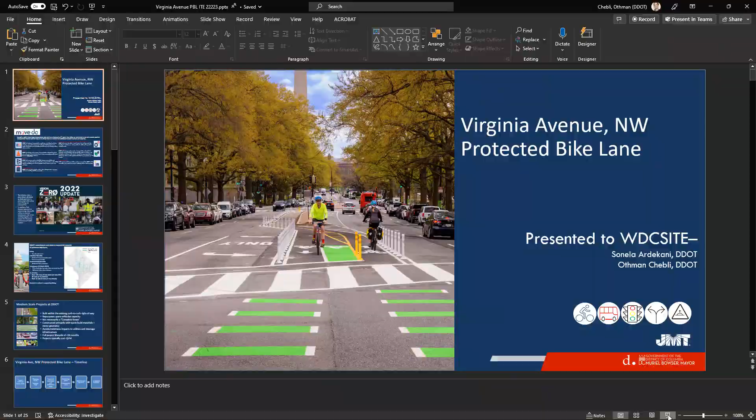Good afternoon, everybody. My name is Othman Chebli, and I am very excited to be here today to talk about the Virginia Avenue bike lane that DDOT completed last year.

As the introduction said, I manage the design and construction branch within TESD at DDOT, and today, together with Sonela, we're going to present the PBL project at Virginia Avenue that we completed. But before that, I wanted to briefly give you an overview of how DDOT makes these decisions and how it ties into our mission and what informs our decision making.

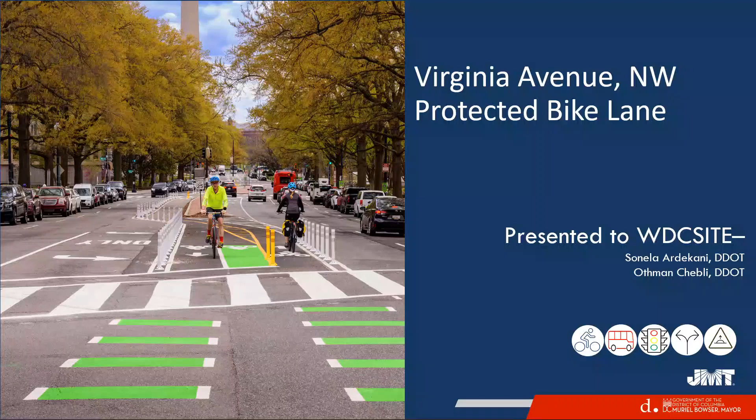The first thing we always go with is the moveDC plan. moveDC, I think most of you are familiar with it, is DDOT's long-range transportation plan. It sets a framework of 7 goals that reflect DC's commitment to address structural injustices and inequities while delivering excellent transportation facilities and systems in DC. The goals, as you can see, are equity, safety, mobility, project delivery, management and operations, sustainability, and enjoyable spaces. I don't want to spend too much time on it; I think most of you are very familiar with it.

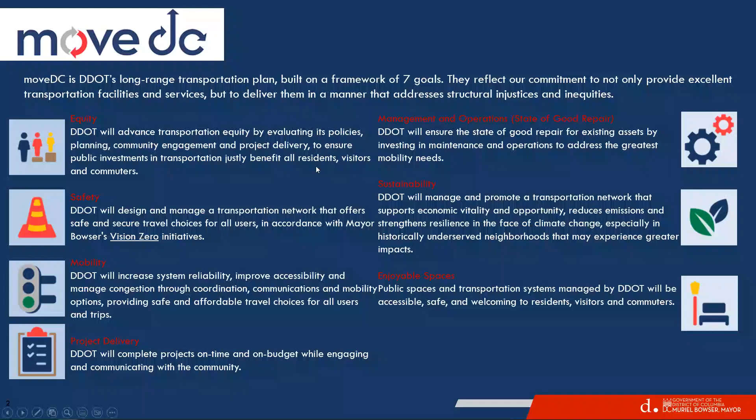Our next decision maker is Vision Zero, and DDOT just released a couple months ago the 2022 update. This one basically outlines a data-driven approach to address the issues facing our communities, and it's been a big DDOT goal to slowly move towards Vision Zero.

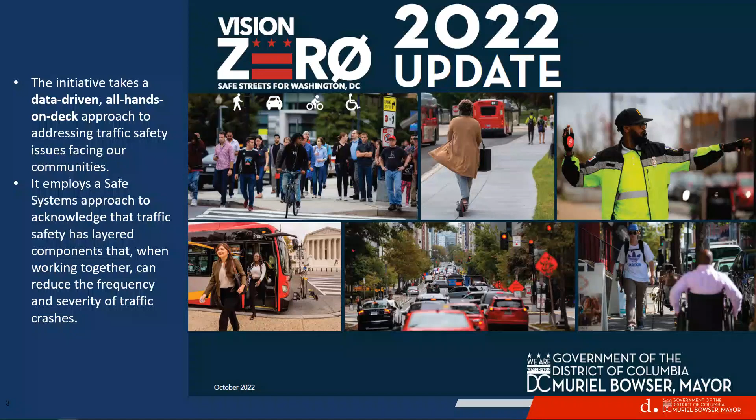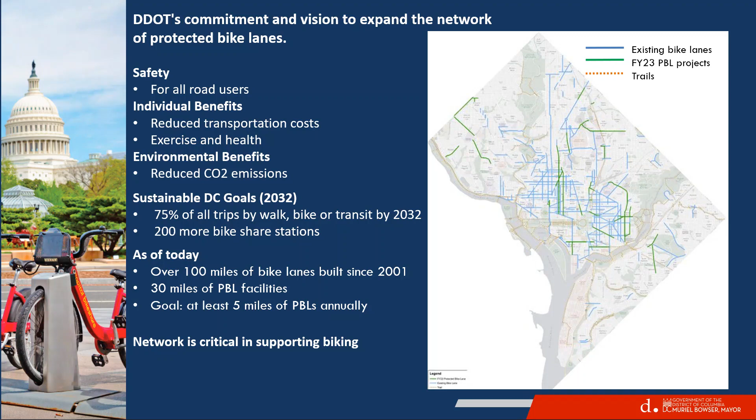And now to our projects. DDOT aims to ensure safety for all users, reduce CO2 emissions, and decrease single occupancy vehicle usage while increasing trips by transit, walking, or biking to 75% by 2032. Since 2001, DDOT has built over 100 miles of bike lanes, 30 miles of which have been or are completely protected bike lanes. Over the next few years, we would like to further connect and strengthen our network by doing at least 5 miles of PBLs annually.

So how are we going to be able to do this? DDOT has been focusing a lot on small to medium scale projects. That's really the main team that does that at TSD. In 2017, when TSD was formed, the main focus was really to be responsible for traffic signals around the city.

Starting in 2018, with the department's focus shifting to programs including PBL, bus priority program, livability studies, and others, TSD has shifted its focus to small and medium scale projects. These are usually built within the existing curb to curb, looking at repurposed and spare vehicular capacity.

We don't do them in the typical transportation project delivery method, like a complete street, as most of our DDOT projects are. Here we usually try to avoid or minimize impacts to utility and drainage, speed up our environmental review process and traffic analysis, and make sure the project starts and is completely done within 18 months, with a cost usually around $2 million or less.

We're doing one currently on Pennsylvania Avenue bus projects, which is going to be about twice that cost, but that will be by far the largest project that TSD has done.

We are able to do this thanks to our 2 IDIQ contracts. I would like to thank JMT and Mead & Hunt and PSI for all the work they've helped us with on this project. Specifically, JMT helps us in the design process, and we also have an IDIQ contract for construction. Thanks to these 2 contracts, we've been able to deliver this DDOT agenda and help the agency reach the goals set forth by moveDC and Vision Zero.

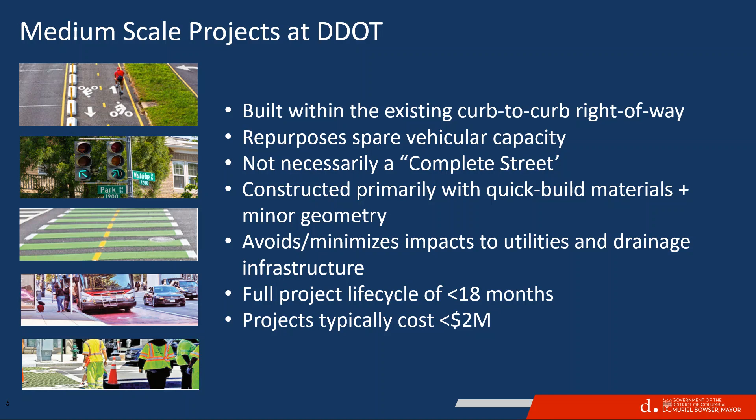And now to our projects. This project was a big milestone for DDOT, as it served to bring the city into alignment with its goal to be more multimodal friendly, reduce single occupancy vehicle trips, and meet our Vision Zero goals.

This project had extensive public outreach, and as you will see through the presentation, the design was innovative in many ways. As the standards for PBLs are still constantly evolving, we hope this project will serve as an example to many others that will follow in the future and be a leader in multimodal project delivery.

As you will see when Sonela presents, this project ties several other PBLs and trails, and it converts general purpose travel lanes.

Yeah, we are really excited to show you. So, Sonela. Yes, hi everyone, this is Sonela Ardekani, glad to be here. Presenting today on Virginia Avenue Northwest.

This is a timeline of the project. The project started, initiated at least in March 2020. There was planning time happening around summer 2020, and we chose a preferred alternative and came up with preliminary plans sometime between summer 2020 and summer 2021, with a lot of community outreach also done during this time.

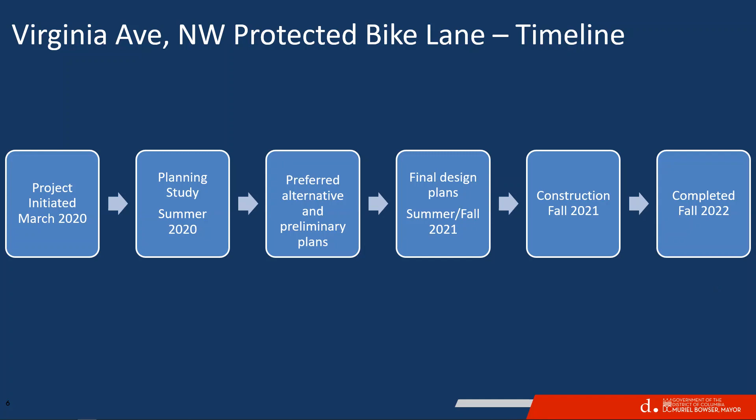The study area of the project, starting from the west side, began with Rock Creek Parkway Northwest on the west, and then went all the way east to 18th Street Northwest. Throughout the whole corridor, there were federal, commercial, residential, and parkland use, so there were a lot of different uses we had to accommodate for.

There were numerous nearby trails that we were connecting with, and that's why this corridor was very important in closing the gap in the regional bikeway network. There were also a few recently added bike facilities, like the bike lanes on G Street and 20th and 21st Street.

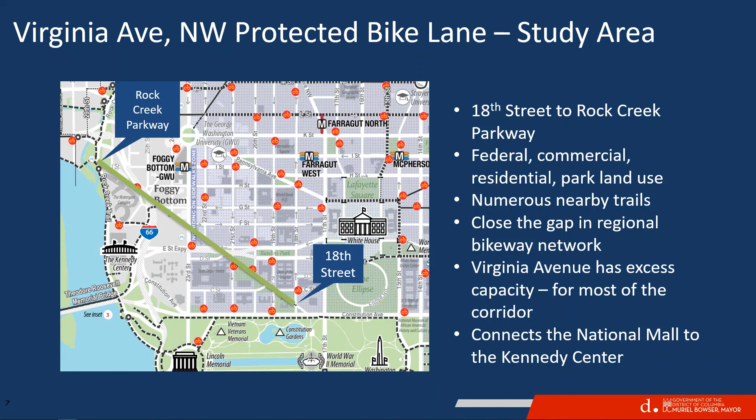Some features of the corridor, Virginia Avenue Northwest, included about 25 intersections and one tunnel/underpass that we had to accommodate for. There were parking restrictions throughout the corridor, as well as peak period lanes and off-peak period lanes that we had to think about when positioning the bike lanes, either on the curb or center running in the street. There were also tour bus parking depending on the part of the corridor, food truck parking especially close to the federal buildings, and barriers in front of federal buildings that we had to work with.

We couldn't touch any of those barriers, so we had to go around them for our facility. Another couple of things were the Watergate Hotel and resident facilities located in this corridor, and also the Kennedy Center. So we had to work with all these different stakeholders.

The lanes on the actual avenue differed from one part of the corridor to another. However, one thing was kind of universal for the whole corridor: there was some excess capacity, so we had the opportunity to eliminate one lane in each direction to add the facility.

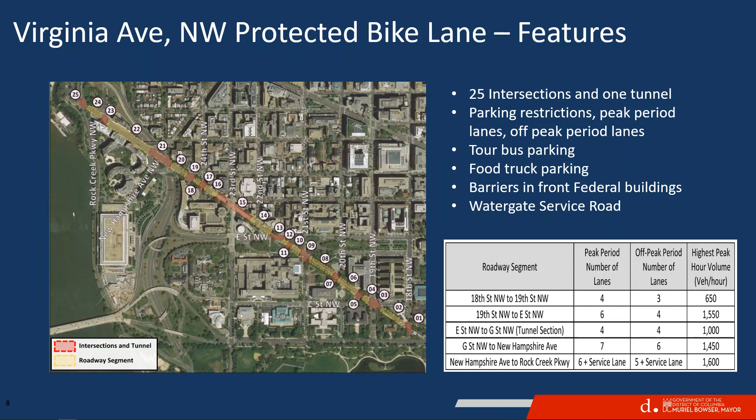During design with JMT, we also worked a lot with different manuals. The Separated Bike Lane Planning and Design Guide was one of them, and the Bicycle Facility Design Guide from DDOT, which had just been produced, was also incorporated into this project.

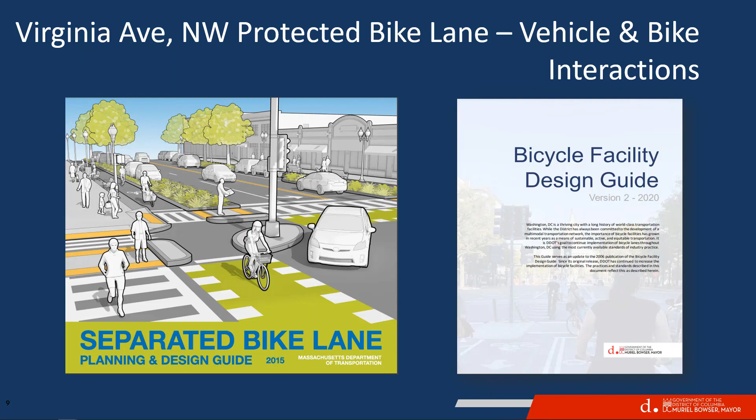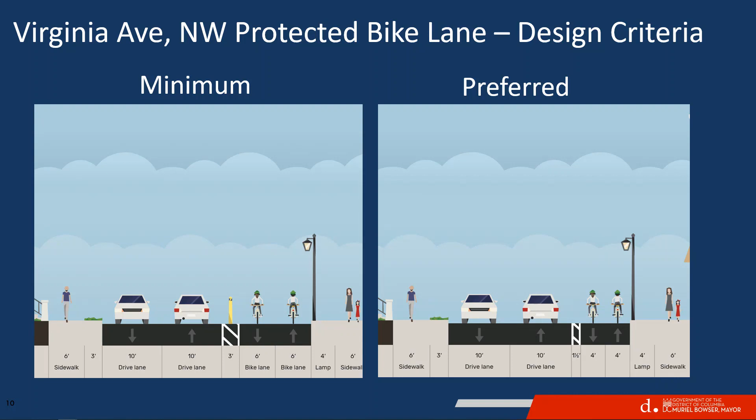Here you can see some of the cross sections that were preferred using the design guide. We would normally prefer to have the bike lanes at about 6 feet wide and use buffers at about 3 feet wide, depending on how much right-of-way we had. We mostly used 5 feet for the bike lanes and about 3 feet for the buffer. As mentioned earlier, we had to remain within the existing curb, so we had to use the right-of-way we had; we couldn't increase it.

On the operation side, looking at this table, we had to accommodate left turns across the two-way bike facility, and also right turns. The left turns are the more crucial ones because the threshold for crossing a two-way bike facility is zero. So everywhere a left turn was going to be allowed after the bike facility, we had to accommodate for it, which led to signal modifications at about 8 or 9 intersections in the whole corridor.

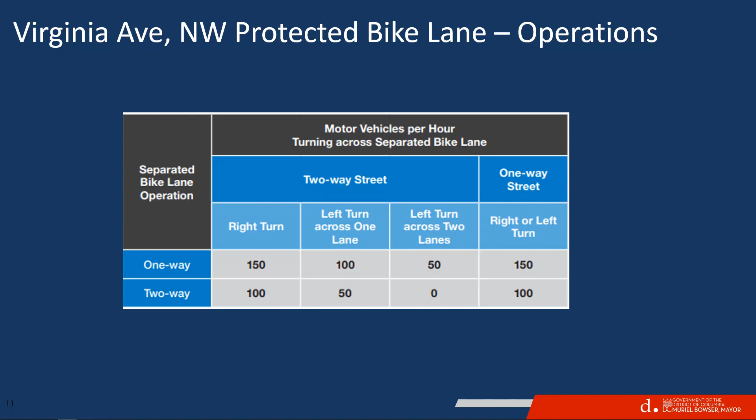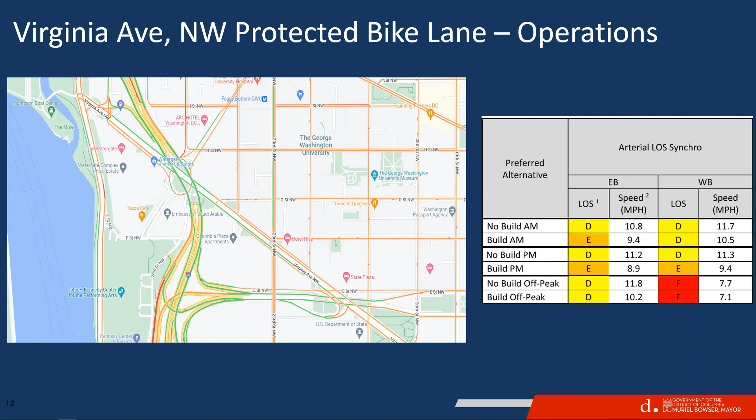Now I want to talk a bit about the key design elements throughout the whole corridor, starting from the west side. On the west side, the Rock Creek Parkway was the western limit, which is pretty much NPS property, so we couldn't do much there. Starting from the eastern curb of Rock Creek Parkway, we were dealing with an island also on NPS property, and the area we had for the sidewalk was about 12 feet.

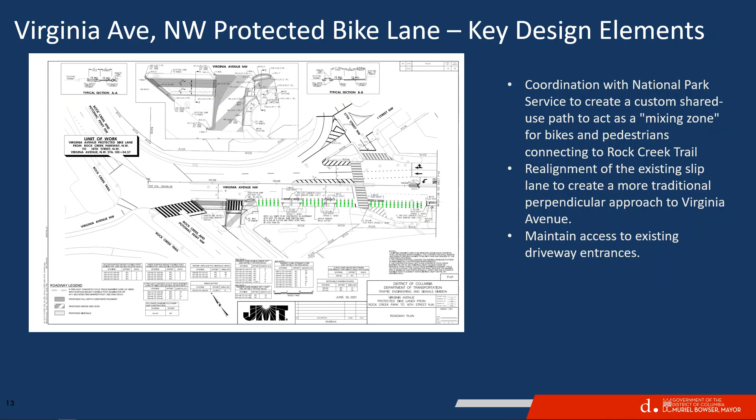We had to work with NPS on how to provide a mixing zone in this area for both the sidewalk for pedestrians and the two-way bike facility. We came up with 6 feet for pedestrians and 6 feet for bikes in both directions, using different materials to differentiate the two: concrete for pedestrians and asphalt for bikes. This all had to be done while maintaining access to existing driveway entrances, including a gas station right next to it and the entrance to the Watergate facilities.

Another part of the corridor was the Juarez Circle and the New Hampshire Avenue section. On the western side of these plans, we had to accommodate a protected right turn and add bike lanes. We needed more space, so we removed the median for about a third of the block and used that space as a through lane.

On the eastern side, we closed the slip lane coming from Kennedy Center to Virginia Avenue. We coordinated extensively with Kennedy Center to make sure we weren't making their operations worse, and additional traffic analysis showed it was still fine to close it. We used that area to add a Capital Bikeshare station.

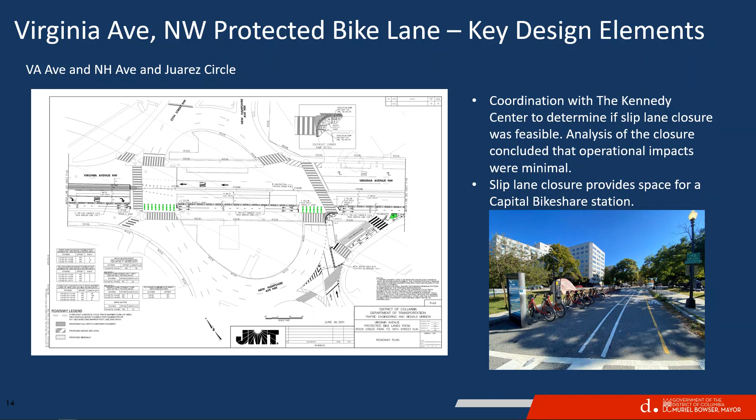G Street was another key element, because we had to connect with the existing cycle track just implemented there, and our facility was transitioning from curb-running to center-running. We had to accommodate a lot in this intersection, so we came up with the idea of a reverse L for the bikes, connecting from the curb to center running and then to G Street. This was one of two intersections in the corridor requiring brand new signals, along with the connection at the E Street expressway ramp, which was major work for us.

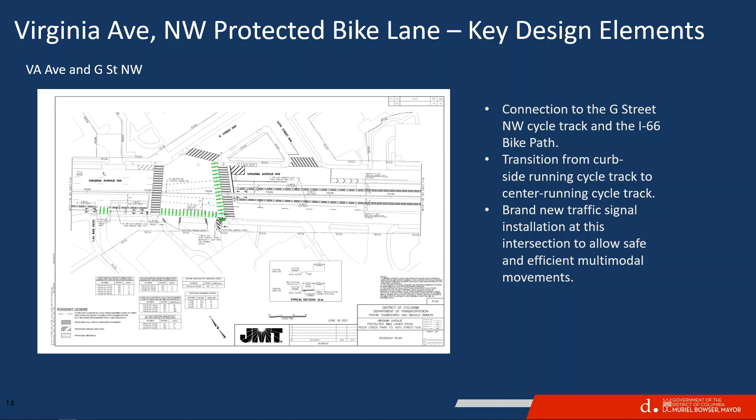Another big element was the 23rd Street tunnel. We had to keep the lanes continuing through the underpass, so we closed one lane on each direction, taking one lane away on each side to create space for the bike facility and the buffer. In the buffer, we added precast concrete barriers and flexible delineators to make sure the facility was secure and safe for the bikes.

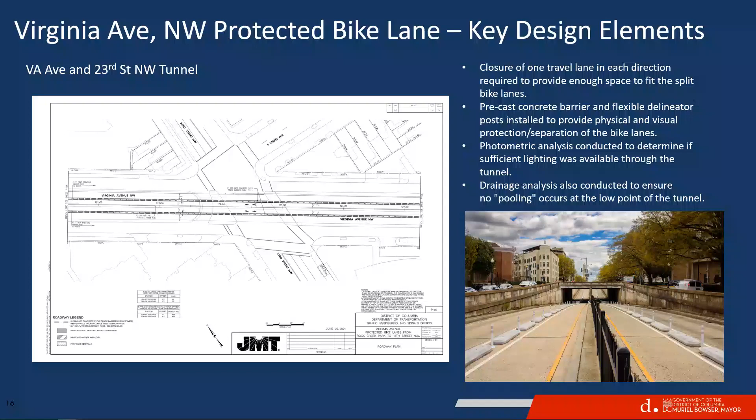We also did photometric analysis to make sure the lighting was good in the underpass, and drainage analysis to make sure there wouldn't be any pooling at the very low point of the tunnel.

At 23rd Street, there was an existing RRFB. We had to go through upgrades of the signing and pavement markings to make sure they were up to date with the design manuals, and to accommodate the new facility at the beginning of the underpass.

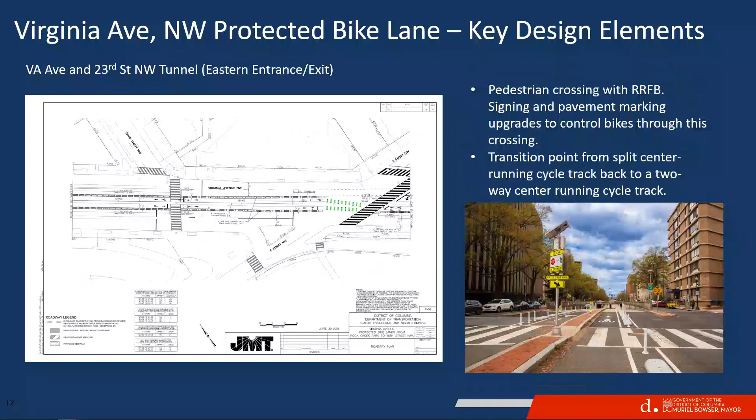At 21st Street, we had another major connection since it had just had a cycle track added, so we had to come up with innovative ideas. Besides the through lanes for bikes, we added a queue left turn lane for bikes in both directions, and accommodated a protected left turn on the signals. That meant a lot of signal modifications on both the bike side and the vehicular side.

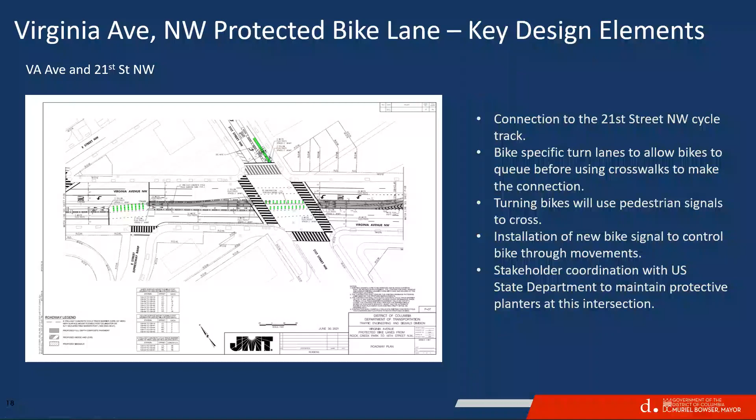At 20th Street, we noticed a crosswalk was missing on the western part of the intersection, so we added it, along with ADA ramps and APS push buttons on both sides of the crosswalk to bring it up to date.

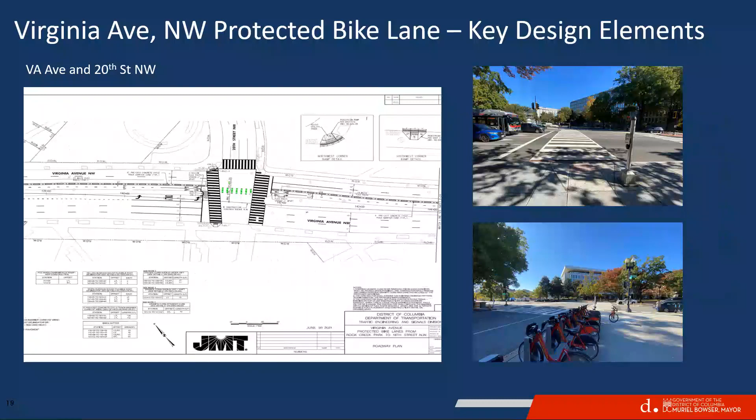At 19th Street, the eastern terminus, the bike lane facility was ending as we connected to the National Mall via Constitution Avenue. There was extensive coordination work between us, JMT, and Mead and Hunt, who were designing the crossing on the other side connecting to Constitution Avenue. We figured out we had to make a final transition from the center-running two-way cycle track to the curbside, while also keeping some parking, so there were many design elements involved at this intersection too.

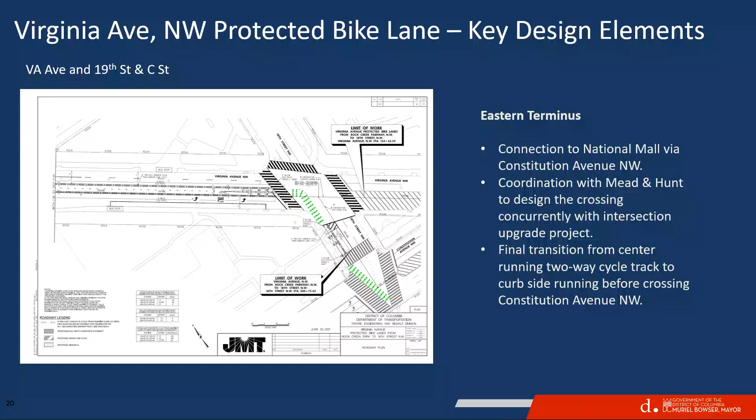There were major stakeholders throughout the project, one being the Watergate Hotel and Watergate residences. We worked closely with them because their service lane ran through almost a third or a quarter of the corridor, so we made sure to place the bike facility in the best location for their residents to use while not impeding their daily movements.

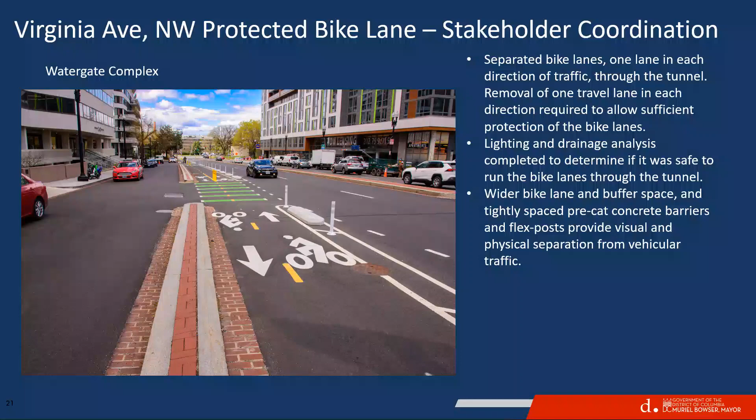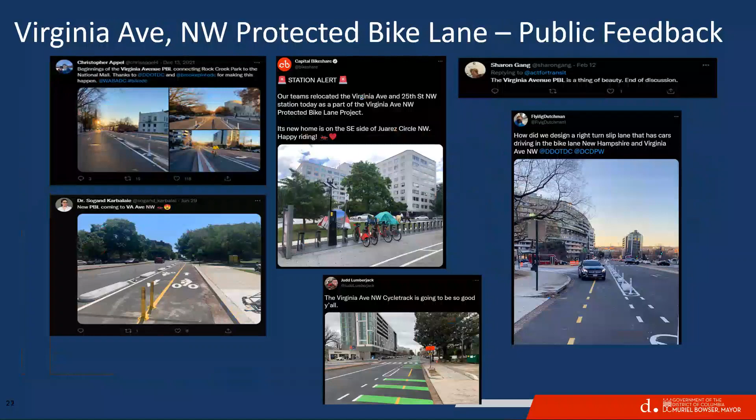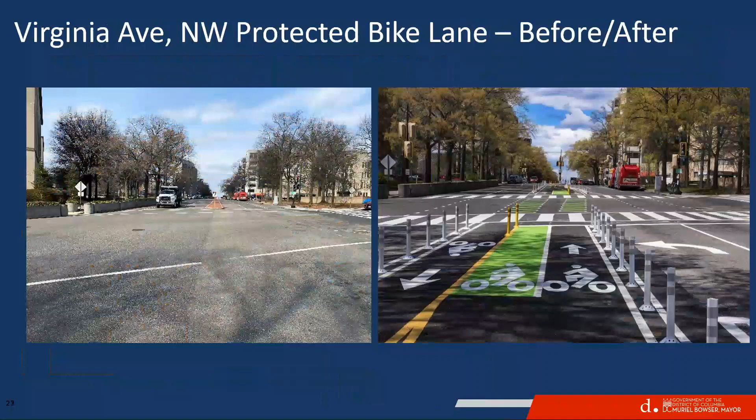We had a lot of public feedback, a lot of good public feedback. There were some critical tweets that we saw, but some users just had to get used to the new facilities. At the beginning, we saw some minor incidents, but mostly a lot of good feedback, people really love the bike facility here. These last slides are just before and after pictures of how Virginia Avenue looked and how it's looking right now, which is great.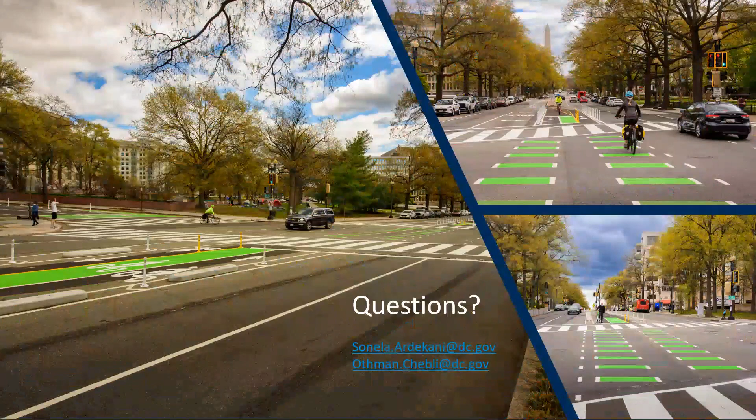All the green markings are pretty much showing the bike lanes on each side, the conflict areas, the queue lanes that we talked about. So that's all I had. Thank you.

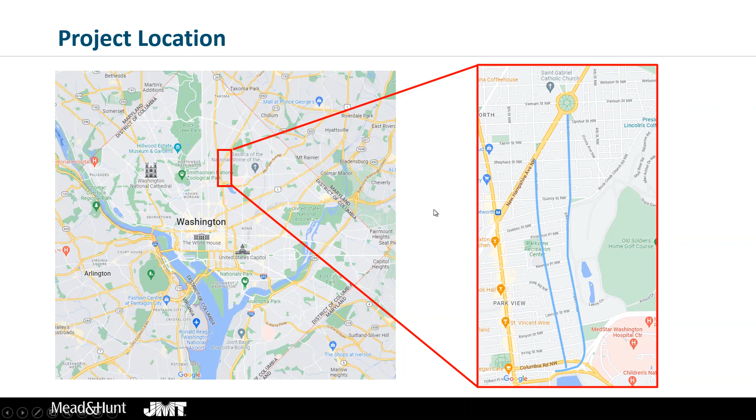Excuse me. The completion of these projects added approximately 2 miles of protected bike lanes to the area, which furthered the crosstown bicycle lane network of Northwest DC that began in 2020. This furthered DDOT's mission to be more multimodal friendly and meet its Vision Zero goals. Warder Street and Park Place both added protected one-way bike lanes, with Warder Street running south to north and Park Place running north to south. In order to remain cognizant of all roadway users, several other features were implemented for these two projects, which include tree pits, additional parking, and the narrowing of Park Place, which had several incidences of speeding. We'll be going into more detail about all of those features in the presentation today. Next slide, please.

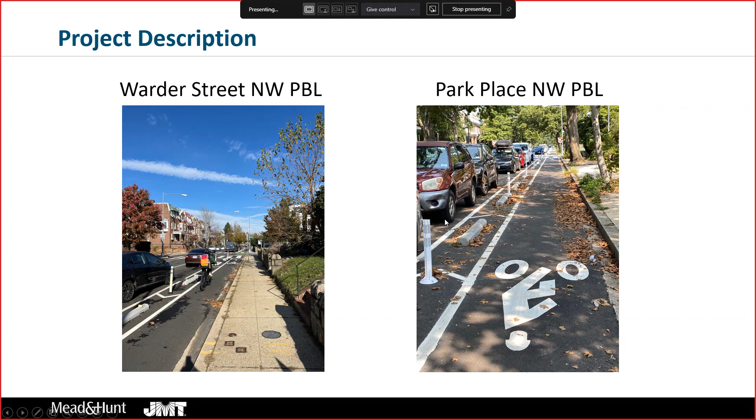Working within the confines of the existing roadway cross-section, JMT and Mead and Hunt were tasked with creating innovative solutions to different aspects of the two projects. The first point I'll touch on is the proposed tree pit green infrastructure improvements proposed on both projects.

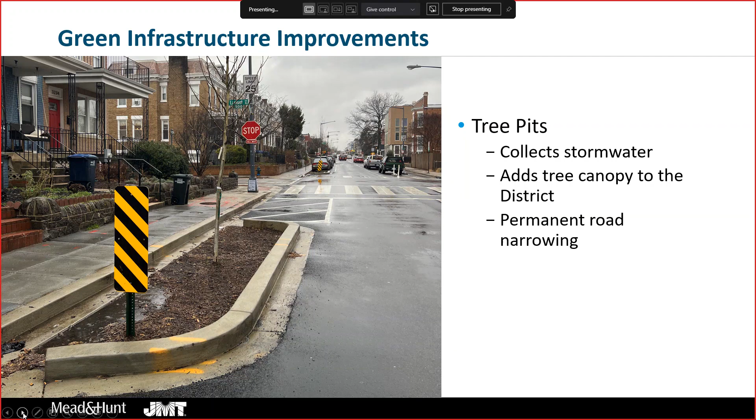Tree pits were a key feature on Warder Street and were also incorporated on Park Place. The addition of 10 tree pits on Warder Street allowed for a unique system of stormwater collection to curb bump outs, which typically would have been impervious. This added tree canopy to help reach the district's goal of planting 10,000 trees to reach 40% canopy coverage by 2032. This type of design was one of the first instances of including tree pits on a bicycle lane project. The tree pits also helped to permanently narrow the road, helping with traffic calming measures on the two corridors. With heavy involvement of the community regarding where the tree pits would be installed, JMT and Mead and Hunt were able to use the solution to better the aesthetics of an area that previously had a limited number of trees.

While this project was mainly a bike lanes project, the tree pit design held significant weight in this being a successful project. During the design, the existing drainage was a limiting factor. The drainage in the area was very old and did not meet today's standards, which created somewhat of a challenge to ensure the tree pit would properly take in and let out water effectively.

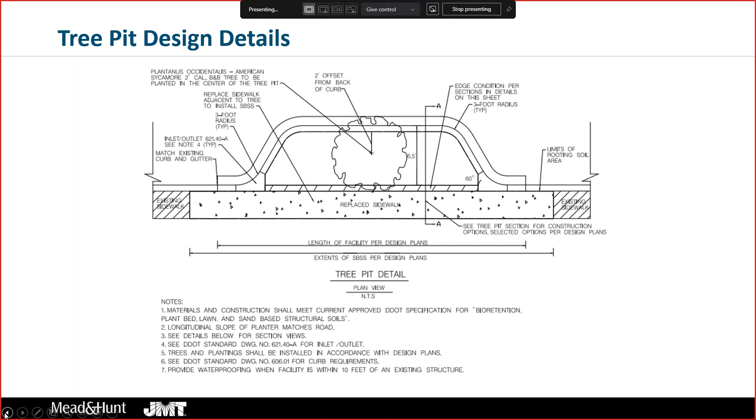Extensive utility research was conducted in order to circumvent and avoid any potential conflicts during construction. This was necessary because the tree pit had to be dug down approximately 6 feet to install all necessary structural soils and allow enough space for the tree to thrive.

The detail shows various types of materials needed to maintain the features of the tree pit. Sand-based structural soil was a key component to the design. This material allows stormwater to properly infiltrate the ground underneath while also providing enough structural base for the sidewalk.

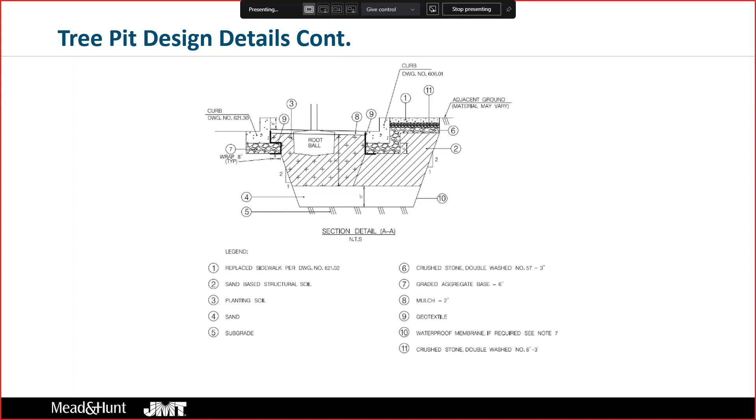Geotextile was also used between planting soils and aggregate to ensure the fine soil would not be washed away with the stormwater. All of this ensured successful tree planting while maintaining structural security of the sidewalk and all curb elements. I'll now pass it to Josh, who will discuss the other innovative treatments on both corridors.

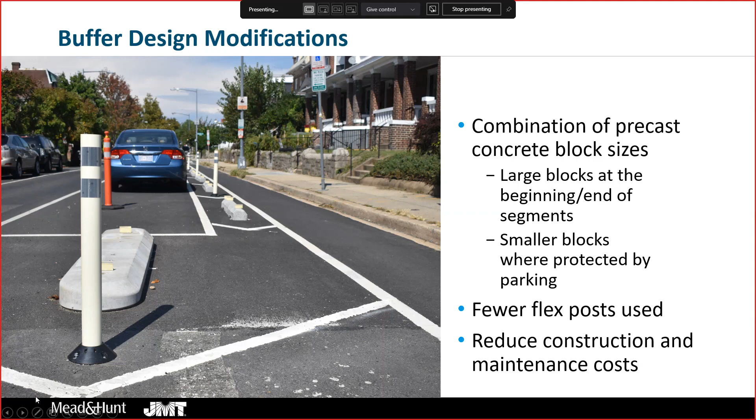The second innovative treatment I'll talk about is the expanded sidewalk buffer that we installed along the Park Place corridor and the accompanying in-street ADA features. Megan already mentioned that Park Place was a road diet project as well, going from 2 vehicular travel lanes to a single vehicular travel lane. As part of that, we wanted to reduce the overall opportunity for speeding and have space for a buffer, but that still left a little bit of roadway width we had to work with.

The problem with this, though, is that there's no existing sidewalk on that side of the street because of the old soldier's home, which is U.S. government property. So we didn't have the ability to expand and add sidewalk. As part of this project, we expanded the buffer width between the PBL and the new parking, kind of creating a pseudo walkway for pedestrians to access their vehicles safely away from the travel lanes.

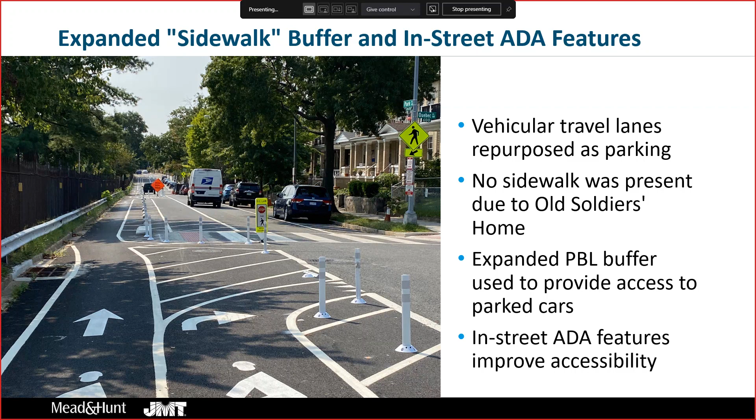We also created crossing points and added in-street ADA features like detectable warning surfaces that provide direction to visually impaired pedestrians crossing the street, and enhanced these with in-street crossing signs, side-of-street crossing signs, and so forth.

I'll transition now to talk about some of the complexities of the projects and the add-ons that we made to enhance the project, changes to scope.

The first of these was extending the limits of the Park Place corridor by 0.3 miles. The original project terminated in the southbound direction at the existing crosstown cycle track that opened a few years ago, at the top of this image. The transition point then was to an unbuffered bike lane just painted on the street on Park Place, through this urban freeway interchange connecting to 5th Street below, which had a protected bike lane.

One thing that came up during community feedback after the 65% design was, can we extend the project limits, convert that segment to protected bike lane as well, and close that gap in the protected bike lane network?

We worked with DDOT to figure out the best way to transition from one side of the street to the other. The project we were working on had the bike lane on the east curb to minimize curb cut conflicts with vehicles. But we had to transition to the other side of the street to connect to the existing facility.

So where was the best place to do that? We ran a couple of alternatives, ultimately deciding to transition at the existing signalized intersection at the top of the screen, where it intersects with the crosstown cycle track. We protected the bike lane down through that urban freeway interchange, cutting down on available space for drivers to speed through these neighborhoods and adding a safe way for bicyclists to connect through that network.

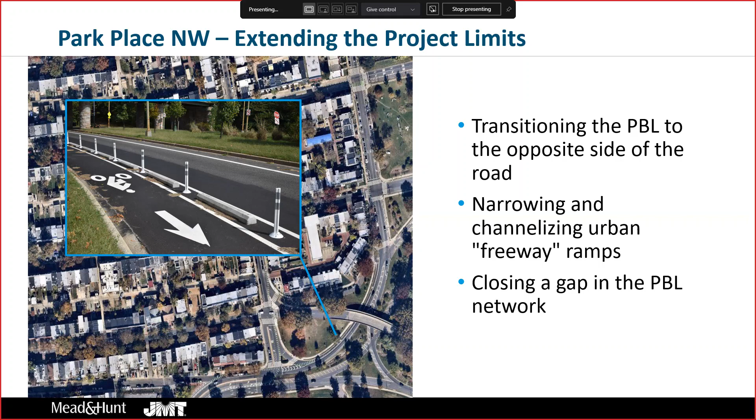We also worked with DDOT to install a contraflow bike lane on Park Road, which runs east and west, connecting the two north-south facilities we were working on. This was done to provide not only a safe bike connection, but traffic calming along this road. Before, Park Road ran two ways for vehicular traffic and didn't really have dedicated bike facilities.

So what we did was convert that to one-way westbound vehicular operations, narrowed the roadway width for drivers, added sharrows as kind of a neighborhood slow street for bicyclists in the westbound direction, and added a contraflow lane for bikes in the eastbound direction—improving safety and multimodal options while providing a two-way connection so people could safely access one facility or the other.

This also leaves open the option to connect to future projects on the west side by Georgia Avenue, allowing for further connections and development of the network.

As part of that, we took an existing safety project that DDOT was already working on at Park Road and Georgia at that western terminus, and incorporated it into the scope of this project—taking those elements and putting them in our design to consolidate the recommendations, make sure they were cohesive with what we were proposing as part of the bike lane project, and reduce overall implementation and design efforts.

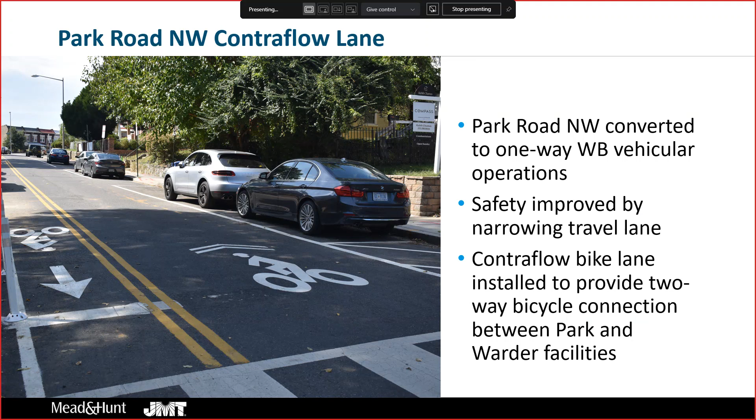And then I'll turn it back to Megan, who's going to cover some of the additions to the Warder Street project that really added value.

Thanks, Josh. As Josh just said, Warder Street also had a few design changes over the course of the project. The first was the closure of the Michigan Ave Northwest slip lane. This was a modification encountered later in the design phase after a community request was brought to the team's attention. DDOT in general is moving towards closing a lot of these slip lanes because they're often dangerous, since they prioritize vehicle movement and speed over pedestrian safety.

JMT designed this closure using temporary materials because of the lack of existing drainage features in the area. We wanted to ensure the water movement was still in good shape, so we did this using the Terracast TSP 40 planters shown in the bottom right of the top photo, as well as flexible delineator posts and thermoplastic pavement markings.

Another addition that was added was ADA ramp upgrades. These were designed after DDOT had asked us to do an ADA analysis of the corridor. As a result, several ramps were upgraded, including the ones on the floating island at Michigan Ave shown in the top photo, as well as the ramp on Irving Street shown in the bottom photo.

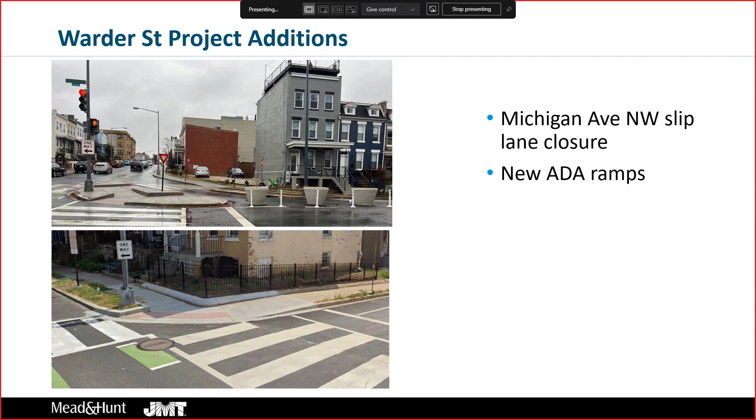Both of these projects had major impacts on the area. The first I'll touch on is the environmental significance.

There are several design decisions that held large environmental implications. The addition of tree pits on Warder Street and Park Place reduced the impervious pavement, added stormwater collection, and added greenery to an area that didn't have a lot of tree canopy previously.

The installation of protected bike lanes on these two corridors narrowed the road, effectively reducing the capacity for single occupancy vehicles and carbon emissions on the two corridors. After completion of the two projects, a more complete network of bicycle lanes was realized in the Parkview and Petworth neighborhoods, allowing safer, easier, and more comfortable travel for users of all ages. This encourages the use of going by bike instead of by vehicle.

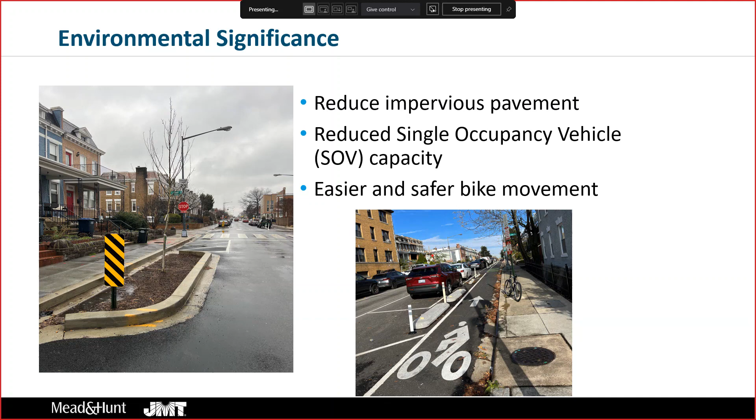I'll now pass it back to Josh to discuss the social and community impacts.

Thanks, Megan. Building off that last point about safer bike mobility, what I want to talk about with the social significance of the project is the impacts to safety along the corridors, not just for bikes, but for pedestrians, for drivers, for residents, anyone living in the area. Improved safety outcomes lead to better quality of life, so that was a huge focus of this project.

In the before condition along Park Place in particular, speeding was a huge problem. You had two vehicular travel lanes on a road that didn't necessarily need two, especially throughout most of the off-peak periods. You had a downhill grade for much of the corridor that really just led to opportunities for drivers to speed.

So we narrowed the travel lanes, the width of the lanes themselves, but also reduced the travel lanes for vehicles from 2 to 1, implemented curb extensions to reduce that width further, and created a channeling effect with parking installed on both sides, creating vertical delineation that lets drivers feel like they're going too fast and enables them to slow down even further. All of these elements were incorporated in order to reduce driver speeding along the corridor and make it a safer place for residents.

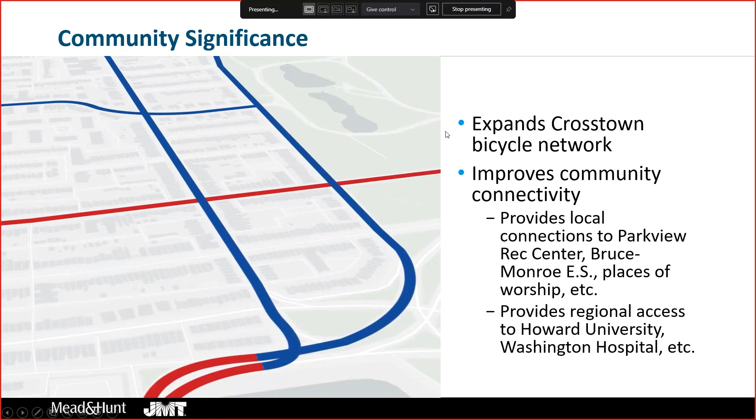They can have other choices in transportation. So I'll conclude. There's a common theme here these past 2 days about everyone showing off the positive tweets they're getting on their projects. I wouldn't go to Twitter for all of my validation, but it's great to see residents really taking to these projects, sharing great pictures and their appreciation for how these projects are impacting their lives. That's what it all comes down to with these types of projects: improving transportation options for people, making better connections for them, safer roads. This was a great pair of projects and corridors to work on. We're thankful to JMT for the ability to partner, and to DDOT for the opportunity to work on these projects and all others across the city. With that, I'll open it up to any questions. Thank you so much.

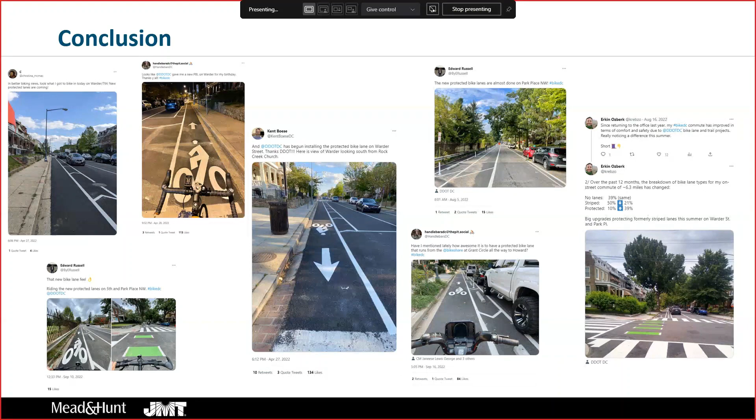First question: why was the cycle track infrastructure completed for months before being officially opened? I biked along there with many others for months while the new traffic signals were covered up. Then DDOT suddenly blocked off the lanes with barriers and announced they had never been opened in the first place. Was there anything getting in the way of enabling the signals? A similar thing happened with the MBT extension to Fort Totten - the trail was ready for months and only officially opened long after bicyclists had ignored the construction tape blocking a perfectly complete facility.

I think that one is actually related to Virginia Avenue, but if Othman is still on, we actually had very few signal modifications on our project compared to Virginia Avenue. I don't know if Othman can answer that.

I'm sorry, Othman, I'm not sure if it's just the problem from my side, but I can't hear - the sound is a bit weird. Not sure, Alvaro, do you have any idea?